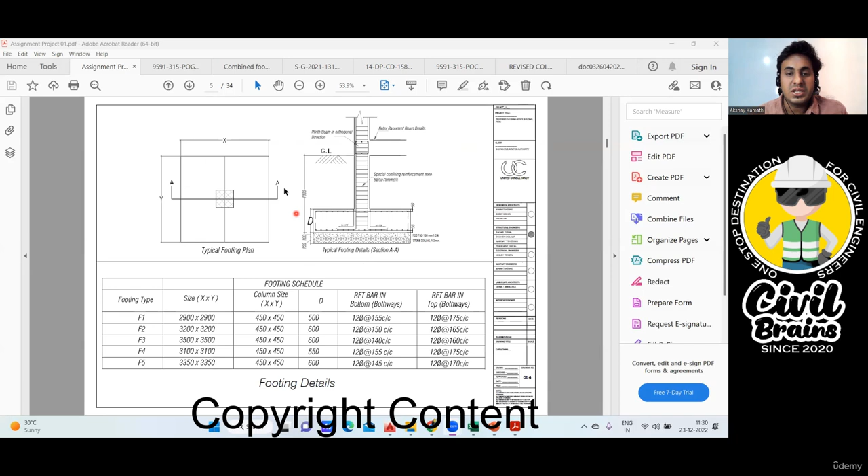All these drawings I've already given you, I hope you've downloaded them. If you remember, we had taken the quantity estimation for this footing as an assignment. Now for the same footing, this time the reinforcement is given.

What is written here? Reinforcement bar in bottom, 12 diameter at 155 center to center spacing, and bar in top, that is both ways.

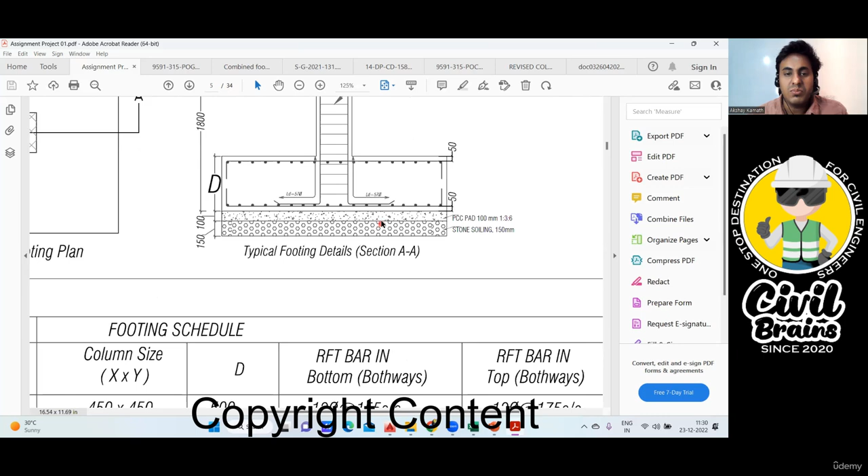Now here what has happened, see this is actually a kind of isolated footing. If you observe, it's isolated footing only, because there's one column and one footing. But like I told you, all isolated footings will not have only the bottom reinforcement. There's every chance it may have top reinforcement.

This situation usually comes when you have industrial structures, meaning you're putting an RCC substructure, and over that a steel structure comes, like your steel column, purlins, rafters and all. Due to wind load and all, there may be uplift, and sometimes because of that reason we give top reinforcement also.

And if you don't give the top reinforcement, that column may punch this footing and it may bulge in this portion. That is why, in order to take care of that, minimum reinforcement will be given in the top also.

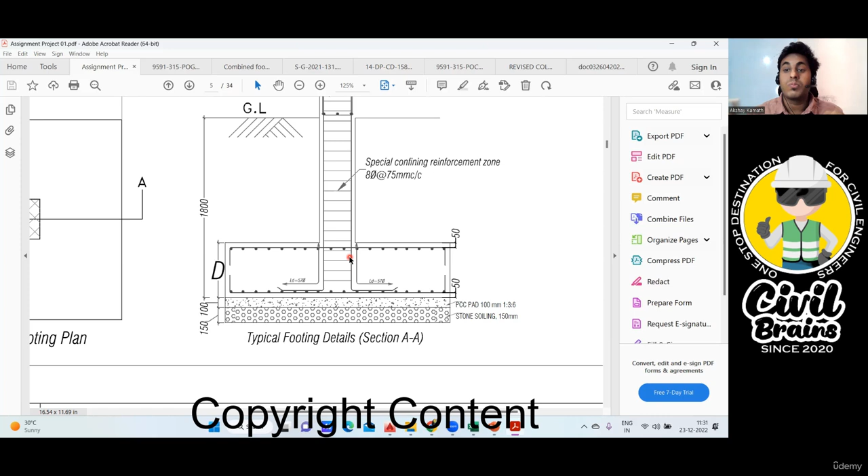So if you observe here clearly, the bottom reinforcement is given, which we usually give in isolated footing, and then the distribution bar. But similarly on the top also we have given. This is actually like a case of combined footing, but it is not a combined footing because you have one footing and one column. But I explained the reason behind that. So that is the reason you get reinforcement here.

It's written in the bottom and they write both ways. Now they don't give a column here. All the drawings won't be like you think. Usually what is mentioned here, both ways, means shorter span and longer span.

This is for the bottom. Similarly, this is for the top. Again, both ways means top shorter and top longer. Both ways means bottom shorter and bottom longer.

Few people, instead of writing it this way, would have made four columns: this for the bottom shorter, bottom longer, then again for the top shorter, top longer. This they would have done, but here this person has not given it that way.

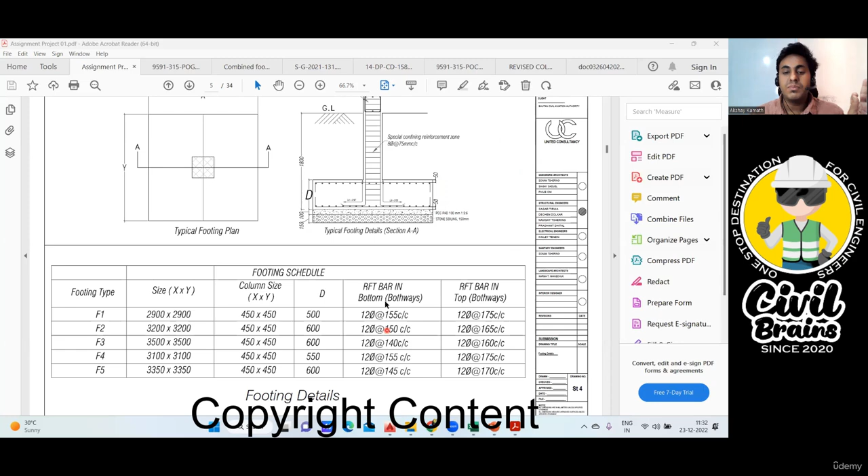Now you can do the BBS for this. Very simple. This BBS is similar to the Excel sheet I've taught you here, the combined footing I taught you, same thing. This is how your BBS should look.

Your bottom shorter will come, bottom longer will come, then again your top shorter will come and top longer will come. Nothing will change. If you want, we can do that also. I'll just input these values and you'll get the answer, so let me do that quickly.

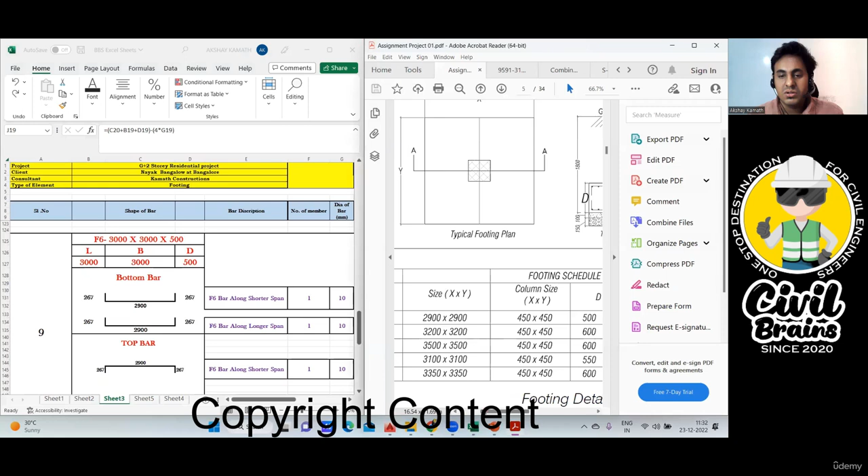First you have to mention the size of your footing, so it is 2900 by 2900. Just input here, 2900. This is also 2900. Then what is the depth of your footing? So the depth of the footing is 500.

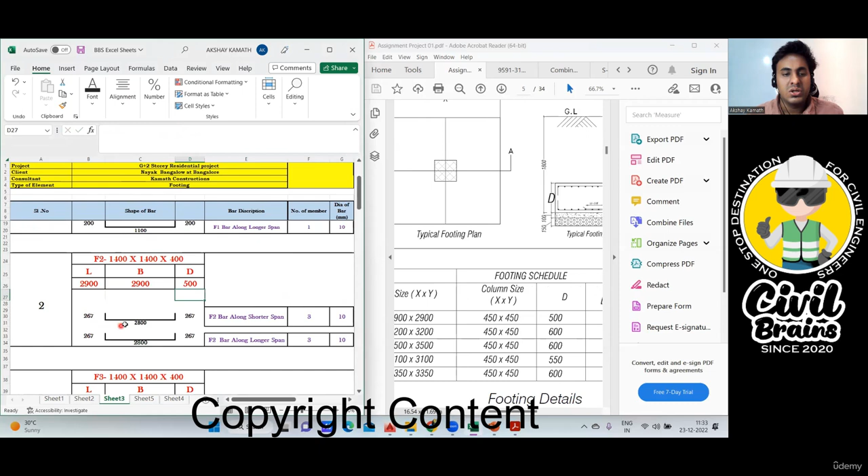So input here 500, done, finish. So accordingly you see you got this reinforcement. Okay, where did I put it? Wait, it has gone to the top.

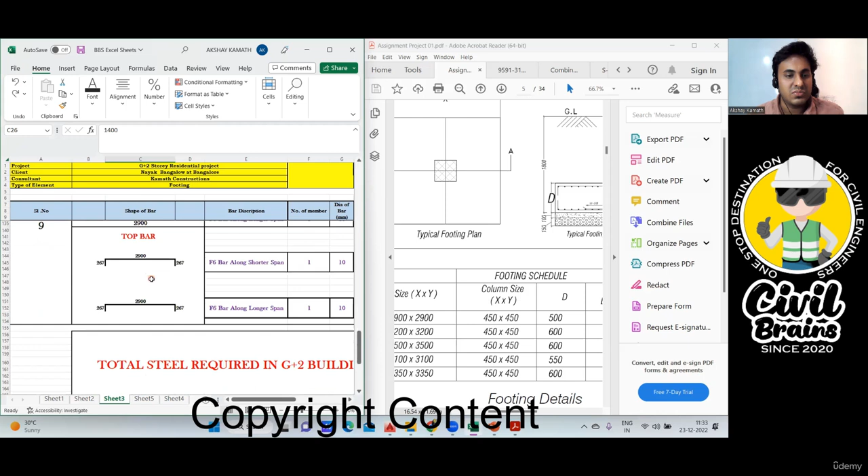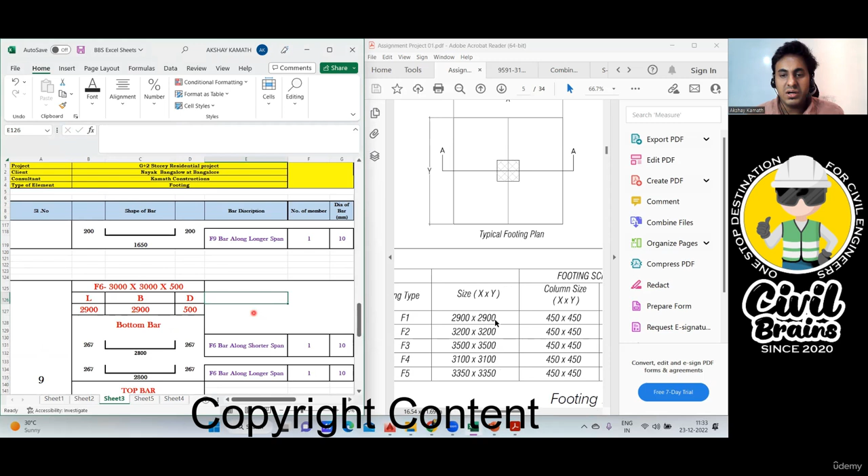No, it should come here, not there. Yeah, here it should come. This is that footing. How much is it? 2900 and 2900, and depth is 500. This is done. So you got the answer here.

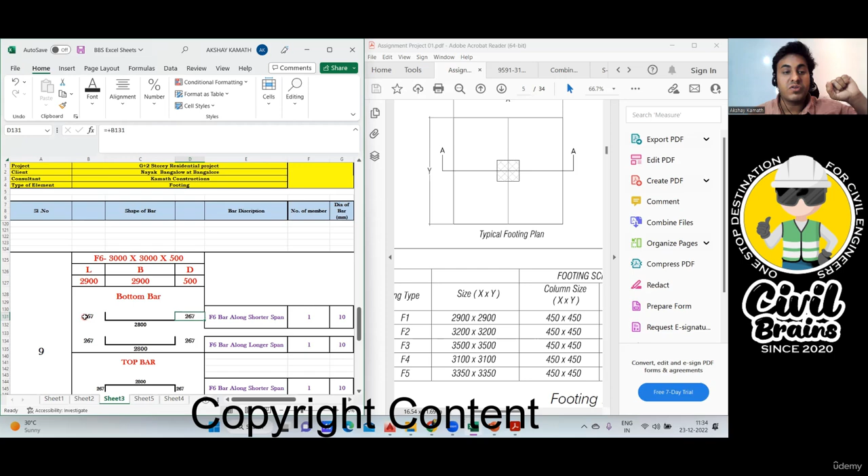Got it? Fine. Now come to the reinforcement part. So reinforcement has written, you're supposed to make use of 12 diameter bar. How many F1 footings are there? So the number is not mentioned. For our understanding, I'll take only one for the time being. Okay, and what is the reinforcement?

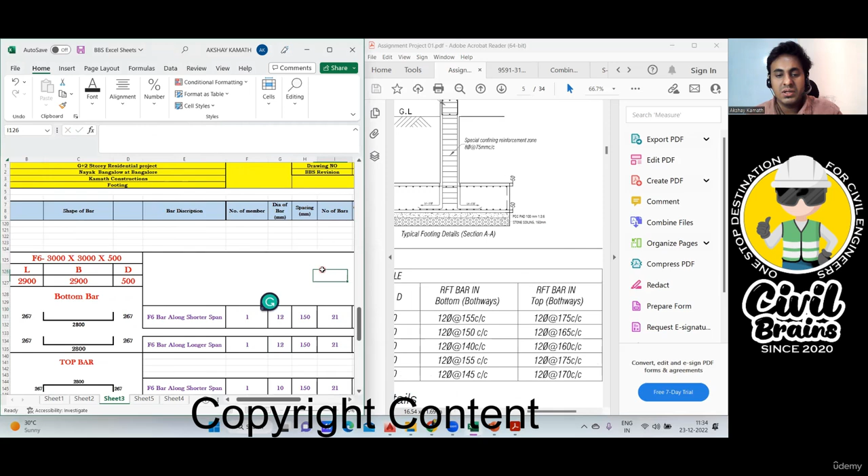12 diameter, so input 12 here, input 12 here. Okay fine, and it is 155, 155. Earlier I had put 150, you make it as 155, and here also you make it as 155.

Done. Where did I do? Along the bottom I did. I want top also, this is top reinforcement. Similarly come here, top also you change. Once you change here, automatically this part also will change. Only the thing is you have to change this part now.

Okay, this is 12 diameter, no? Make it 12, this is also 12. You know the reason, okay? 12, 12. And what is the spacing in the top reinforcement? See, it's written in both ways, shorter and longer, it is 175. So I'm making 175 here, 175 here, finish.

Done, okay, accordingly you don't have to do anything. You got the answer, total 20 bar is required. Here 20 is required, and in the top you require 18 and 18. Why does this become 17 then? This is 18, okay, round up.

I think a small mistake we have done, because this should have come plus 10, plus 10. Then why is it not coming? 175, 12, 12, 175. So round up, round up.

Okay wait. Okay, so this is one problem. See, if you interlink, if you write 3000 and all, it will create a problem. So always try to interlink it shorter, no? So I should take the longer one. Now it should come correct.

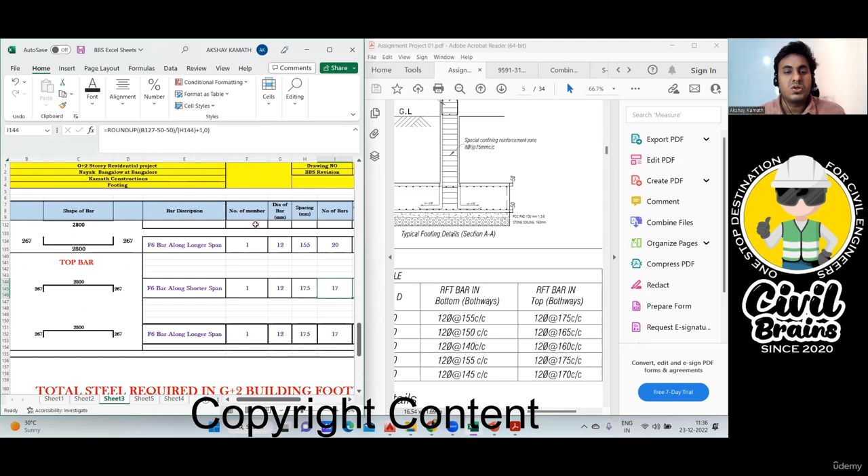Yeah, 17, okay. Because manually I'd input 3000, no? So obviously the Excel sheet will not work out. So always try to interlink that, this has to be interlinked. Okay great, now it is 17, 17.

And I think, yeah, here also there is a mistake. See, here also 3000 I had written manually. You should not write that, you're finding along the shorter, no? So you have to take the longer span. Spacing you're finding, no? Yeah.

And here also it should not be 3000. Okay, you're finding the shorter, longer, no? You have to take shorter, that is B. Now it is correct. Here also you have to take, fine, now here it is correct.

Okay, anyhow let me make it clear. I have taken shorter span, if I'm taking shorter I have to take the longer one. Okay, longer I have taken, correct. And if I'm taking the longer, I have to take the shorter.

So shorter will be, yeah, shorter will be C. Yeah, so correct. B, and this is C. So okay, fine, good, done.

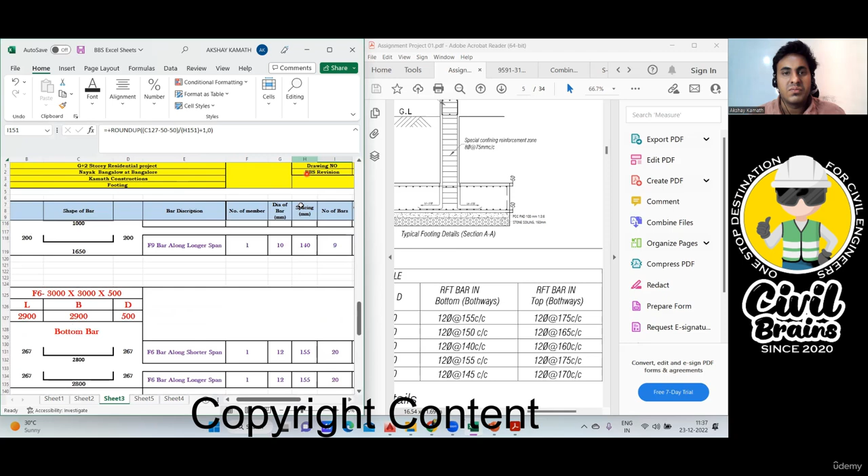Finish, your answer is ready. Only thing is, what change are you supposed to do, no? This answer will come in 10 diameter, which is actually wrong because we're making use of 12 diameter, no? So in that case what you do is you strike out the answer, you delete this, you delete this, you delete this. Why? Because it is 12 diameter, so your answer should come in 12 diameter.

So what you do is you come here, say plus this total cutting length, you multiply this total cutting length with weight of 12 diameter, which is 0.888, and hit the enter button. Finish, so 58.35 kg of steel is required.

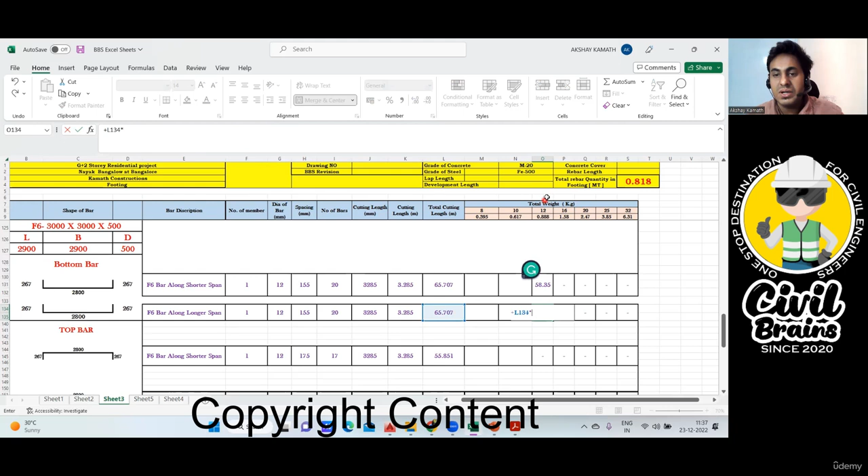Similarly here also you are supposed to do the same thing: 65, multiply this by 0.888. Okay fine, similarly here also, click on this and multiply by, again it's a 12 diameter so 0.888, enter. Similarly here also this one multiply by this one, enter. Got it? So this is the right answer what you have got.

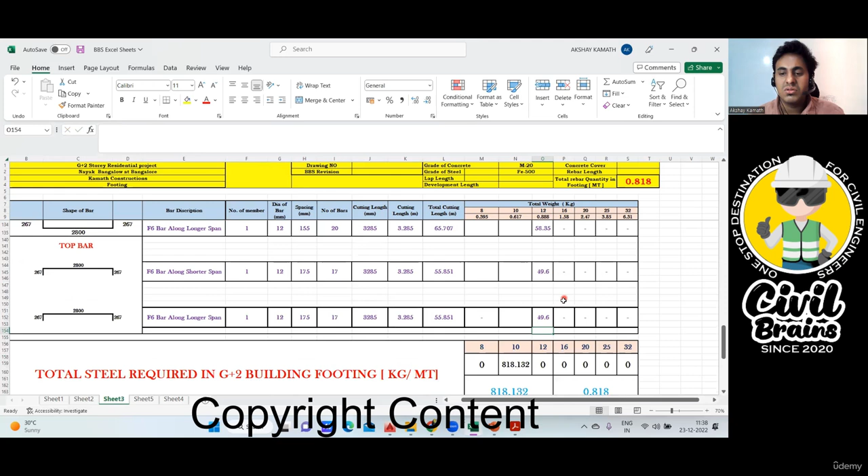Got it? So if you want, you do it manually and check the answer what you have got, you'll get the same answer. So that is the easiness of doing an Excel sheet. If you prepare the Excel sheet in this way, you can take out all the quantities.

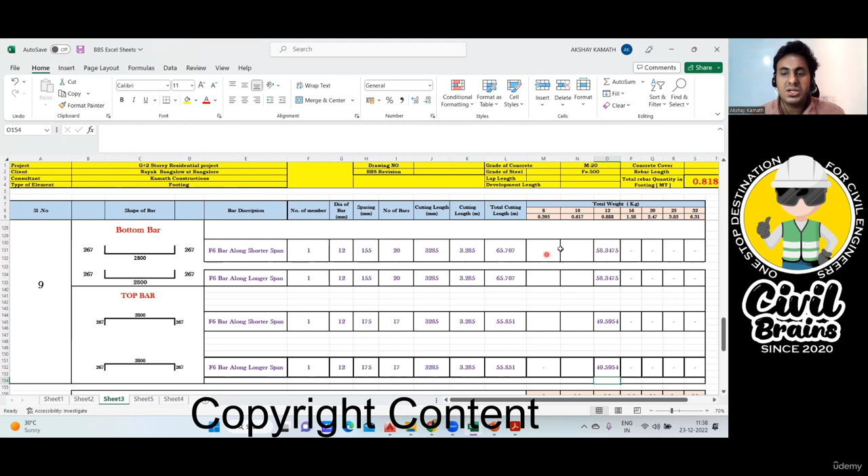So one I've explained, similarly rest you try to do on your own because now you are in such a position where you can do all these things. Okay, similarly try to do it. I always tell, if you're working for the first time, do it manually, then do it on the Excel sheet and try to verify the answers. Only then you'll have confidence in that.

Okay, now try to do for the other thing also, all these things you try to do on your own. Okay, one assignment is done. I'll go to one more assignment now. So one more assignment is this one.

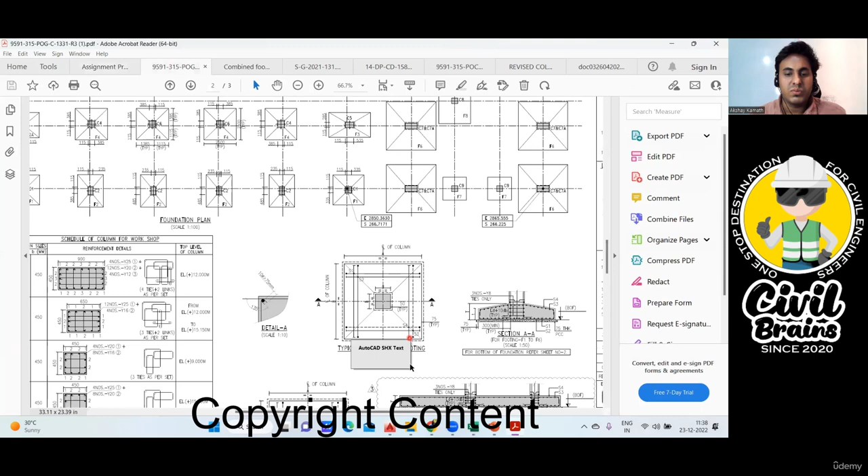Okay, I won't be sharing this drawing since these drawings are not to be shared, okay, they're confidential drawings, only whichever is shareable I'm going to share. Okay, don't ask for all this drawing. Only thing is what you do, you just take a screenshot of this, if you are interested, take a screenshot.

Now here, all the footings are given. Here you just concentrate on the reinforcement details. Again same thing, here S1 and S2 is mentioned, S3 and S4 is mentioned. What do you mean by this?

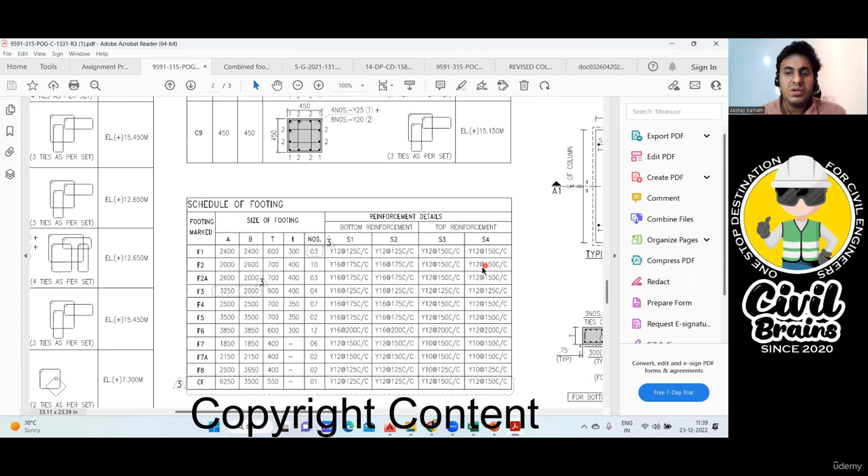The meaning is very simple. This you consider as a shorter span, this you consider as a longer span along the bottom. Again top reinforcement, again this you consider along the shorter span, and this you consider along the longer span. Okay, if not in that way, usually what you can do is you can check the cross section of the footing.

See, this is a cross section what is given. Now if you observe here, see where it is mentioned. So your S1 is S1, and this is S2 they have written, and this is S3 and this is S4 they have written.

Okay, so how do you understand this? It's a cross section what they have given. So you can consider your S1 to be your distribution bar and S2 be your main bar. Similarly, on the top, this S4 is your distribution bar and S3 is your main bar.

Wait, sorry. S4 is your main bar because bottom shorter span, bottom longer will come. Again in top, shorter span, and inside that will be your distribution bar. The main reinforcement will be at the top, whereas in the bottom, the main reinforcement will be in the bottom. In the top, your main reinforcement will be the top. After the top, the bottom is next to the top. This is top main bar.

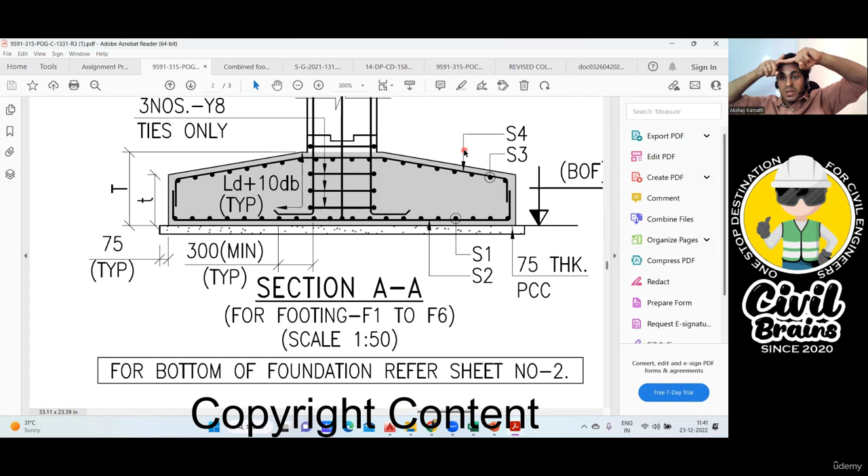This will be below that. But in bottom, this will be main. Over that, the distribution will come. And in the top, this will be main. Below that, the distribution will come. So in the top, this will be my main reinforcement, and this will be my distribution. In bottom, this will be my main reinforcement. The dotted is a distribution.

Okay, fine. And for that, they have given it here. If you don't understand from there, they have given it here also. So how they have given, you can go through this drawing. So this is typical. They have written like this is S1. Where is S1? This is S1. Okay, this is S2.

And this is why it is dotted. The dotted indicates it's a top reinforcement. And S4 is top, S1 is bottom. Are you getting my point? Usually if you don't understand, whenever a drawing mentions dotted, it means it is in the top reinforcement. They mark it as a dotted line. That is a typical way of doing structural detailing.

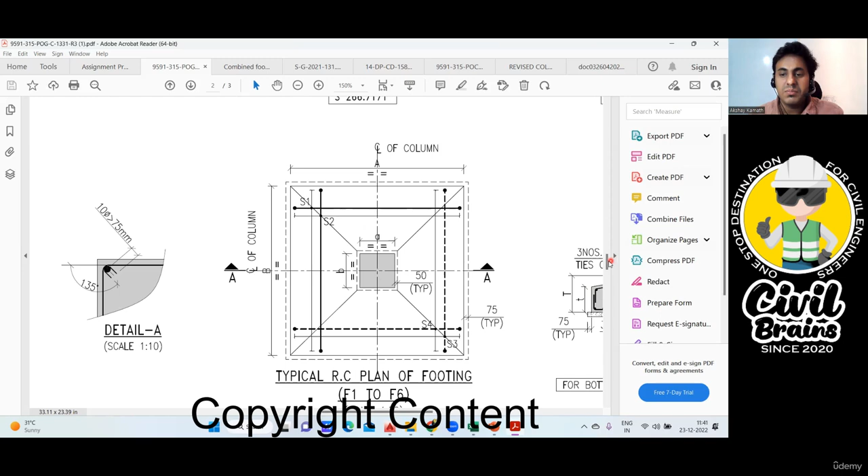So this is S1 and S2. And then based on that, you can check this thing. Come to the footing reinforcement. Anyhow, it doesn't matter to you. You just take out the quantities if you are interested to take.

So you take this as shorter span, you take this as longer span. And on top, you take this as shorter, you take this as longer. Okay, very simple. And anyhow, it's very simple also.

See, this is 125, 125. It is 150, 150. Again it is 175, 175. This is 150, 150. 175, 175, 150, 150. 125, 125, 125, 125.

Got it? Just in case, take a screenshot of this and try to do the BBS for this. If you have any doubt, get back to me, I'll solve your doubt.

Again, even though this is an isolated footing, this CF means combined footing. Even though it's an isolated footing, again you get a bottom reinforcement and top reinforcement because it's an industrial structure. In industrial structures, you get such kind of reinforcement.

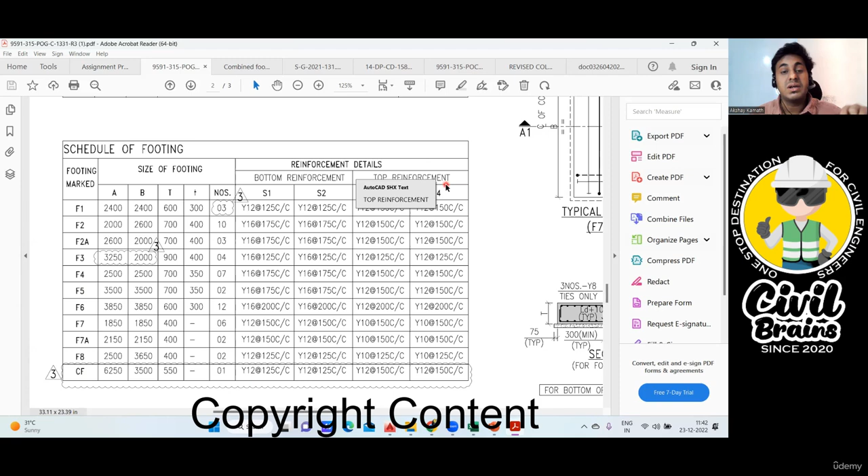Okay, two assignments are done. Next, we'll go to the third assignment. It's totally up to you whether you want to do it or not. If you are okay with the concepts, you don't have to do that.

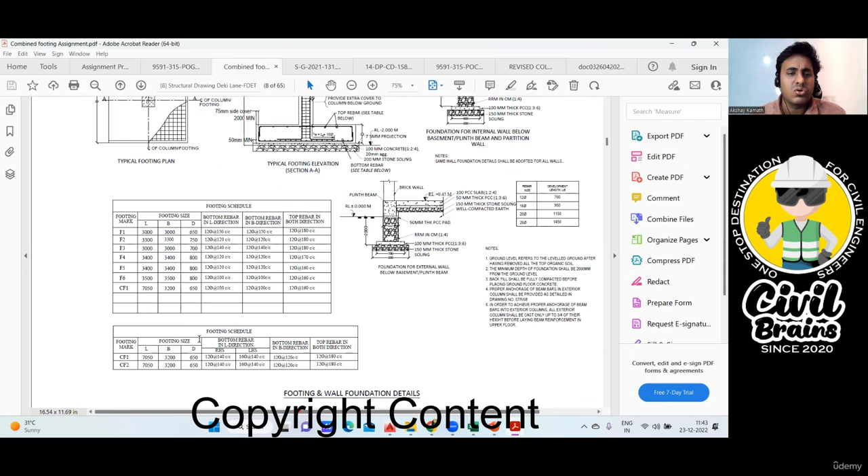That's it, simple. Again, here also same thing. Footing schedule is given. Bottom rebar in L direction, that means along the length direction, and bottom rebar in B direction, along the breadth direction. That means this is your shorter span, this is your longer span. That is why we have prepared the Excel sheet in that way.

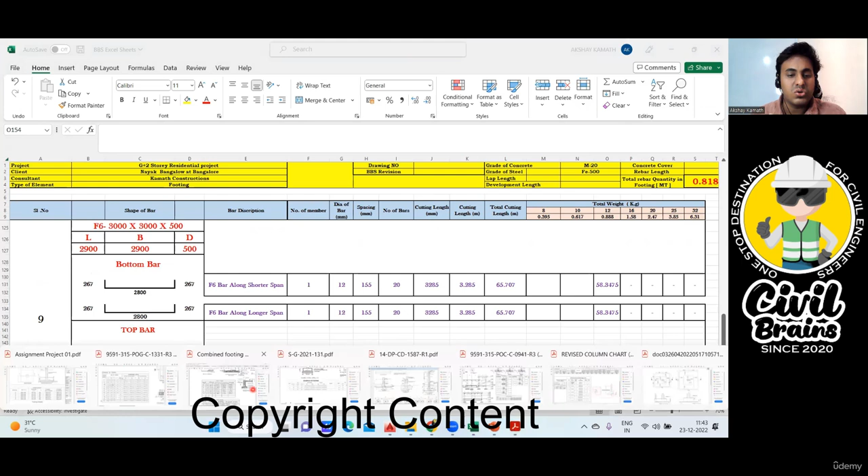Bottom and top, along shorter span, along longer span. Got it? Then the drawing is given to you. Based on that, you can take out the quantities. So this is a drawing given. Can you take out the quantities here?

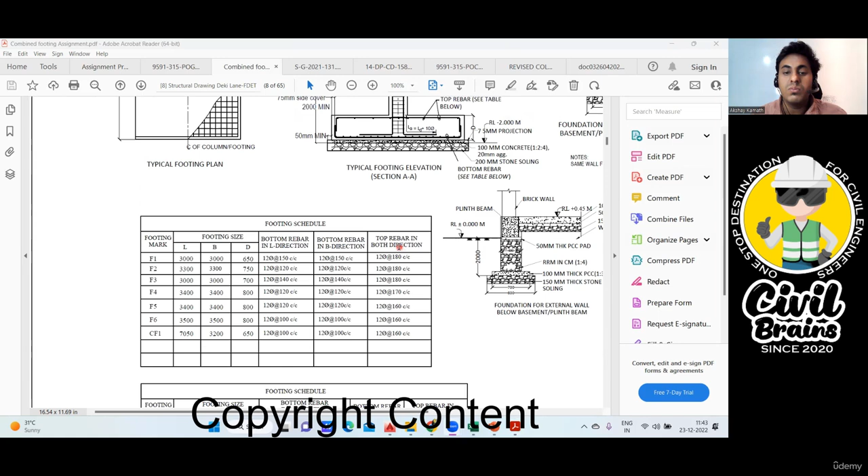Again here you see same thing. Bottom shorter, longer, and top also shorter, longer, but it is given in both directions. It's understood that longer and shorter both are 12 diameter at 180, 180 spacing. So you can do the quantity estimate, I mean BBS, for this particular footing also. Try to do one or two footings so that you get an idea.

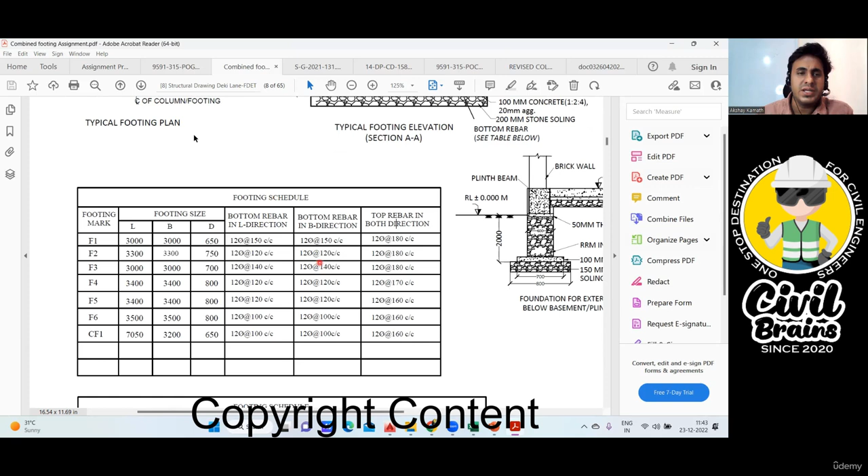Fine. Next, in the same way, I'm taking a lot of drawings. You take a screenshot of this because these drawings are already shared with you.

This drawing is shared with you, and this one too. But this drawing I cannot share - you can take a screenshot of it instead. Don't ask me for these drawings because those I cannot share, but you can take a screenshot of this one. You note it down and do the calculation yourself. Then if you want me to verify it, send me the Excel sheet and I'll verify it.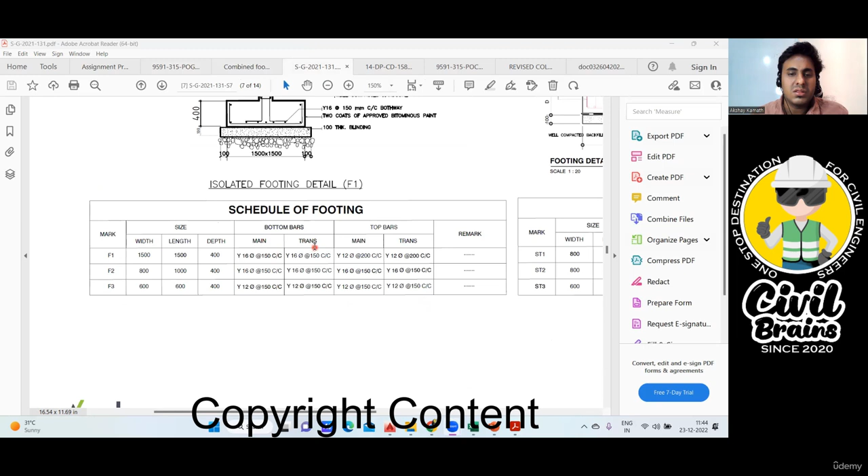Okay, bottom bar, top bar - again same thing. So bottom main, this is TRANS. What is TRANS? I don't know what you mean by TRANS exactly, but actually it's distribution steel - main bar and distribution. Okay, understood.

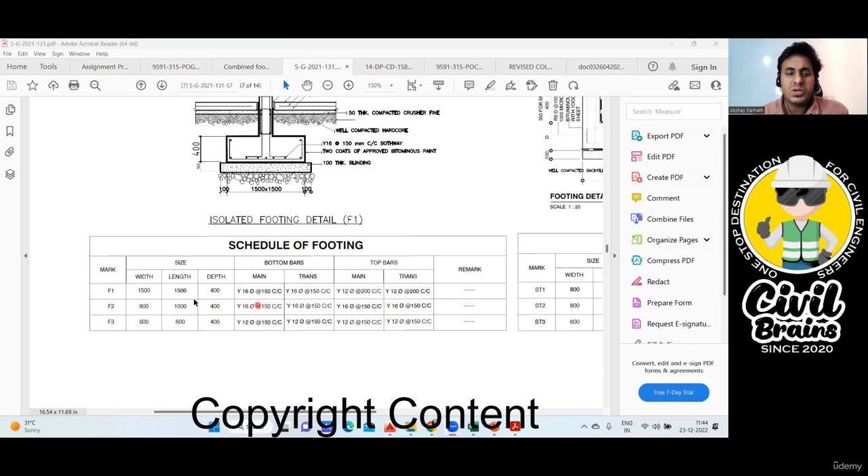You can do for this also. Then, I had taken one drawing earlier where I explained this - the slope footing. For the slope footing, it's the same thing. BBS won't change, only the estimation will change, whereas BBS remains the same for the slope footing also. So for the slope footing, they have mentioned it here.

You can do this too. See, footing F1 and F2 is given. Forget about all these things - this is not required. When you come to the BBS, this part is not required. We are only concerned with the steel, so it's written here.

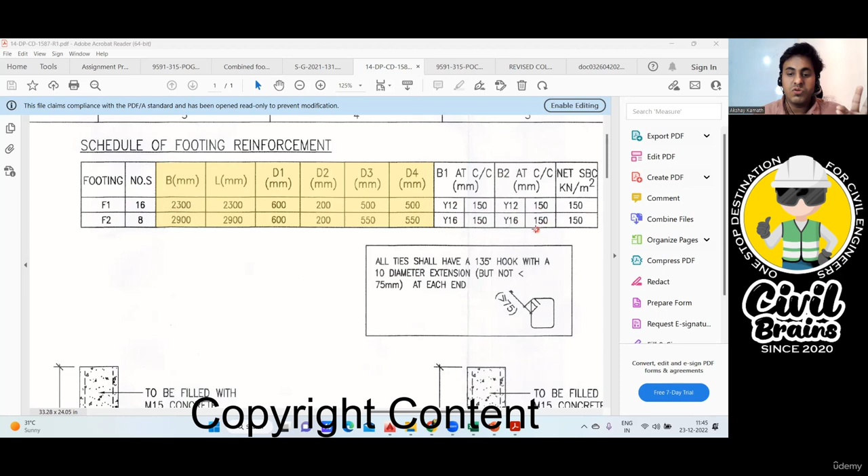I'll go to the Excel sheet and take one footing - this particular footing. I'll go here and do it here. Quickly tell me what is given there. So I can do it in this way.

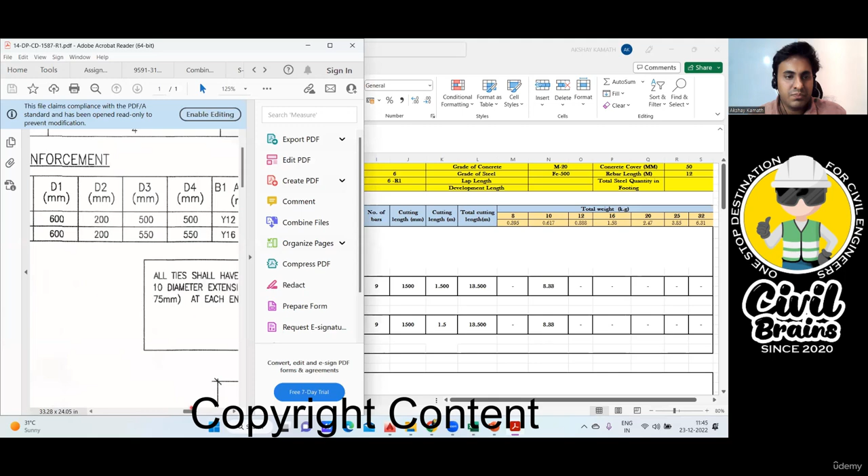I want the size of the footing, which is 2300 by 2300. Let me input that - 2300, and this is also 2300. Done. Next, I want this thing.

So what is the depth of the footing? In the depth, what you're supposed to do is take the overall depth. Oh yeah, overall depth - no wait, not the overall depth, you're supposed to take this depth in case of this footing. Yeah, this you may have a doubt about.

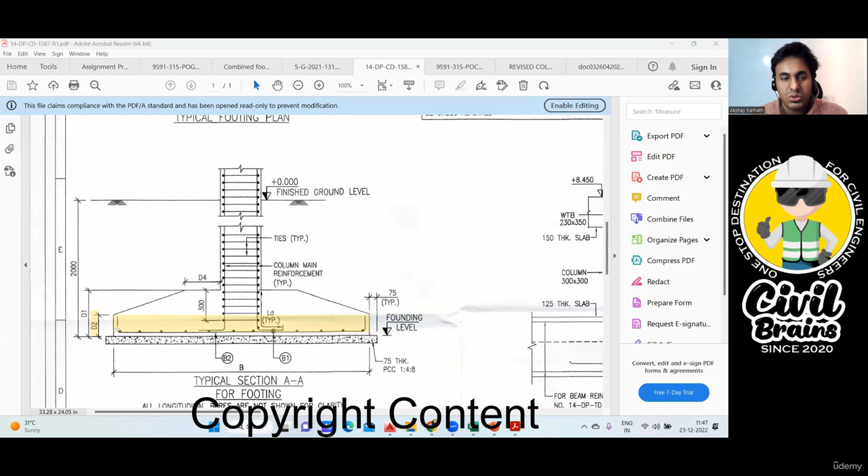See, when you're doing this slope footing BBS, your D will be only up to this depth, because your L will go only up to here. So you have to consider D2, not D1. D1 is the overall depth, that is not required. Your L shape will be bent only up to here, so take the D2 dimension. For the D2 dimension, we'll go back to that again.

So we'll find D2 from here. We have to take D2, which is 200 in both cases. So again it is 200 for us - I'll take 200, so depth will be 200. I'll change according to that, and we can round this up.

So you round it up since it is coming to this point - round up, comma 0, close the bracket. Okay, the error is because of the bracket, so give one open bracket. Now it will be okay. Fine, 67, 67 - got it?

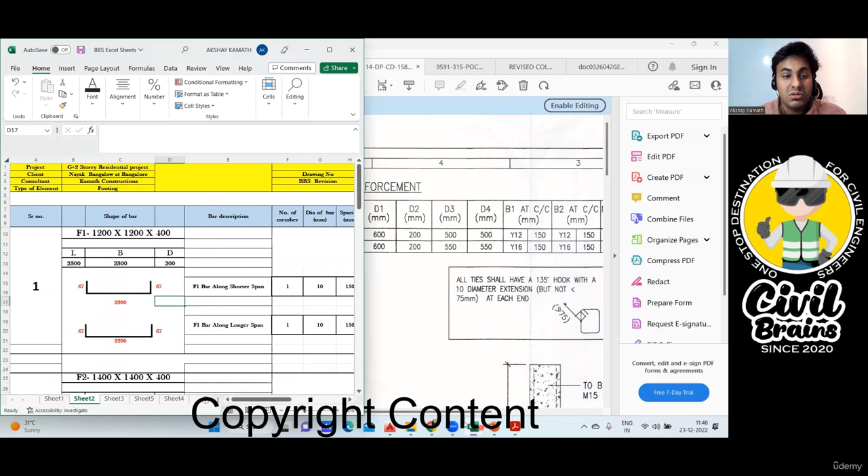No, when it comes in decimal, try to change it. Finish, now come to number of bar. How many F1 footings are there? There are 16 F1 footings. So come here, make 16 here and make 16 here.

Finish. Again, then diameter - you're supposed to make use of 12 diameter at 150. This is along the shorter span I'm doing - first this one, 12, and spacing is 150. This is the shorter span, so shorter I've done 12 at 150. Next I'm doing for the longer span - the longer I haven't changed, it is mentioned again 12 at 150, so here you change it to 12.

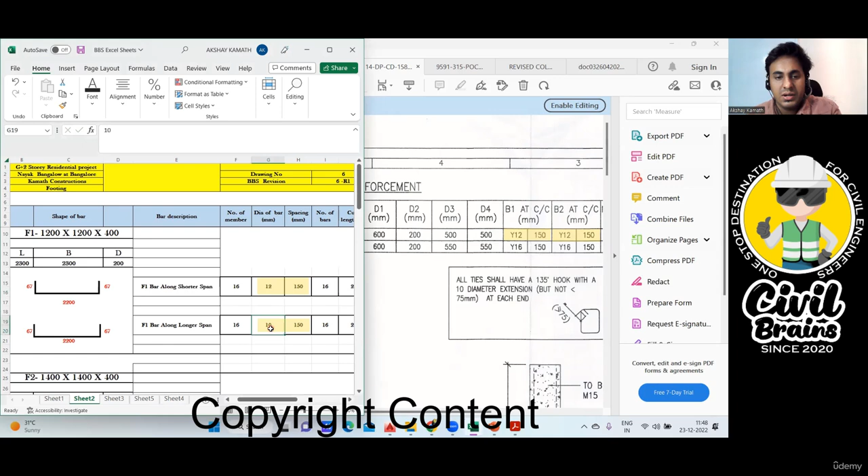You make it 12 and this is 150. Got it? Done, finish. Once you do all this update, finish. Your answer is ready. What is the answer? Simple. Your total cutting length will be 2200 plus 67 plus 67.

Okay, I haven't done the bend deduction. If you want, you know the concept now. Bend deduction, if you want, you apply it. Let me apply minus 4 into, which is that? This one, 12 I'm supposed to take. Done. Here also, if you want to apply bend deduction, minus 4 into 12. Done. Okay fine, and total cutting length will be how much?

How much cutting length? 2.286 is the cutting length of one bar. Multiply by number of bars. Number of bars I'm getting 16 into 16, I have to do because there's 16 F1 footing. Okay got it? So totally it will be how much?

Now one change should happen. Always remember, because I'm finding the weight of a 12 diameter bar, but my weight is coming in 10 diameter column, so this I should delete. So when you do this, this is one problem, you come in the 12 section, right? Plus this multiply by 12 value. Enter, finish, your answer is ready. Plus this one multiply by 12 value. Done, finish. So this is the total steel that is required.

If you're putting an F1 footing of 1200 by 1200 by 400, having 16 numbers according to this particular drawing, then your BBS will be this much. When you give it to the bar bender, you have to tell cut this 2200, cut this 67, make this 67, 67, 67, 2200, and accordingly you try to do. And if you ask what should be

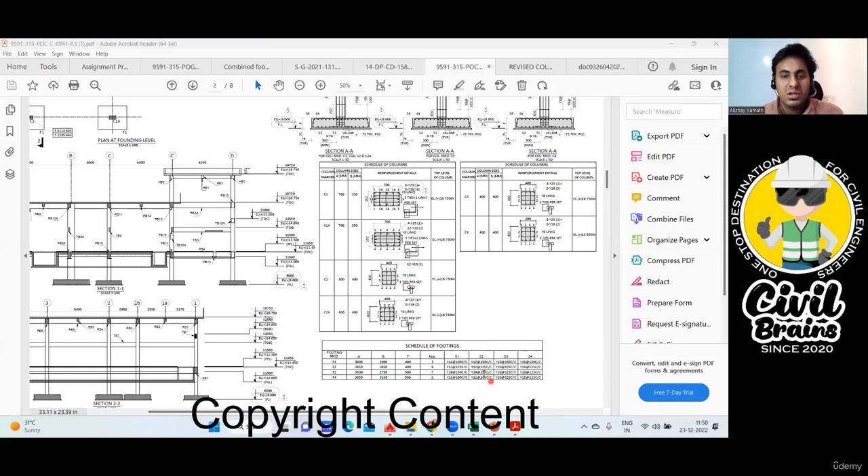Okay great, I think most of the things I've taken care of. Okay, and then again, I think it's enough. Most of the things I've explained you. Again it's the same thing. If you want, again, not required.

This is another, again I won't share this drawing. This is another industrial building, because whenever you find, no, this is actually isolated footing, F1, F2, F3, F4. If it is combined, it will be CF1, CF2. It's isolated, but you're getting a bottom reinforcement shorter span, longer, top reinforcement shorter, top reinforcement longer. Done. If you want, you can do BBS for this also, so that you don't have any doubt.

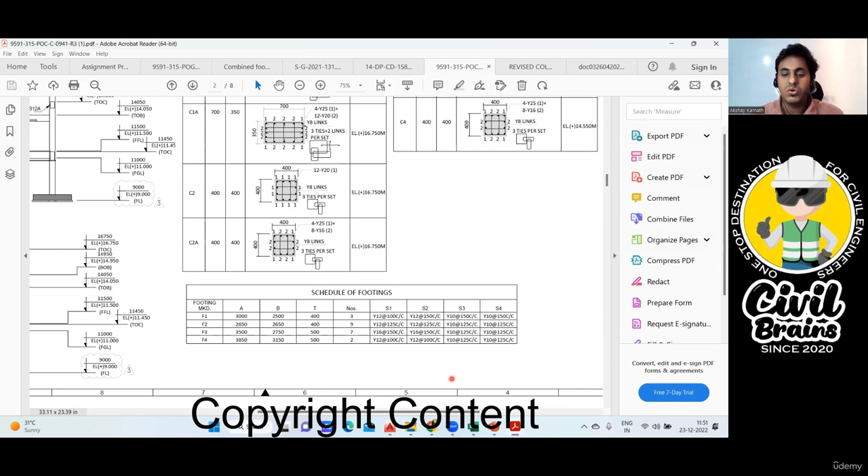Now let me go to a few of the industrial projects. Again, same thing. This was one of the projects which I had explained you in the quantity estimation time. Right now, see, this is BBS. If you can do, very simple, we can do the BBS. Same thing, just I'm showing you just for your understanding. Okay, yeah, again,

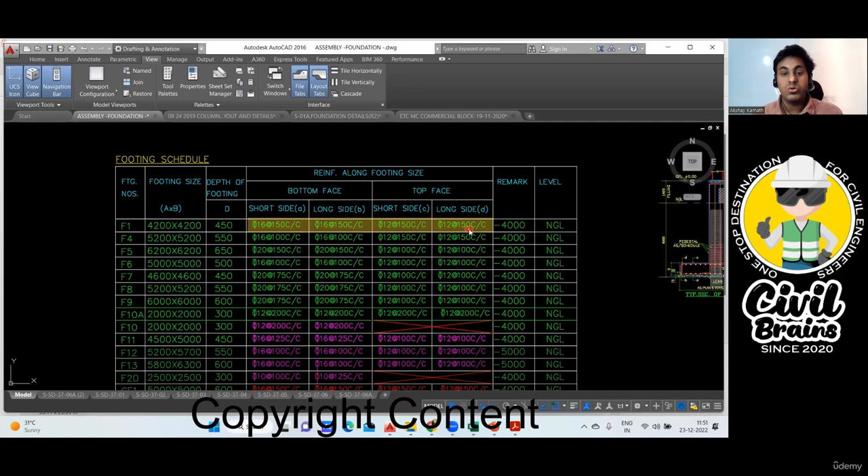same, bottom face, shorter side, longer side, 16 at 150, 16 at 150. Again top face, shorter side and longer side. You can do the BBS, very simple. What you're supposed to do, just take that value and you have to input that in this particular area, this particular thing, okay, because you have a bottom, you have a top reinforcement.

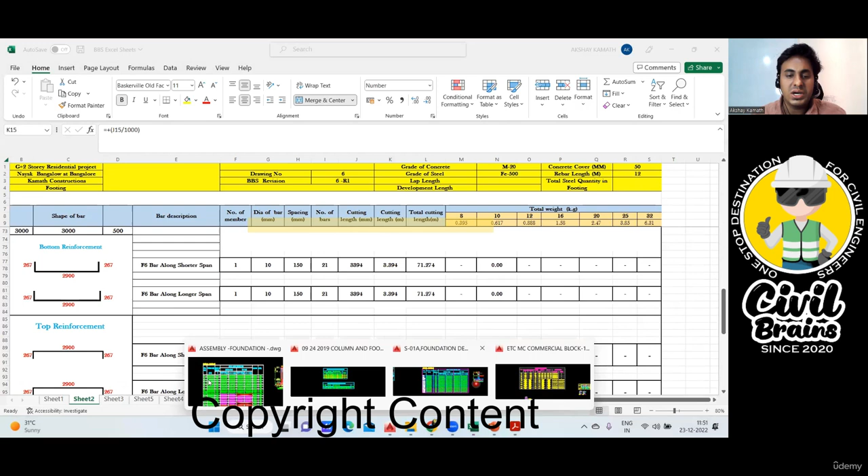So this you can do, no? You can take a screenshot of this, and if you want, you can solve one or two problems, so that I'm trying to touch all the drawings. This is another industrial project. Okay, because industrial projects are a little bit complicated. That's it, this is one more.

I think, yeah, this is another commercial building, a very big commercial building. I won't share this drawing, okay, because few things I have shared, I already told you. And then don't message me for the drawing. Those drawings which are shareable, I'm going to do, because all these things is not required for you. Whatever is required, I'm showing it here. Okay, you can take a screenshot of this.

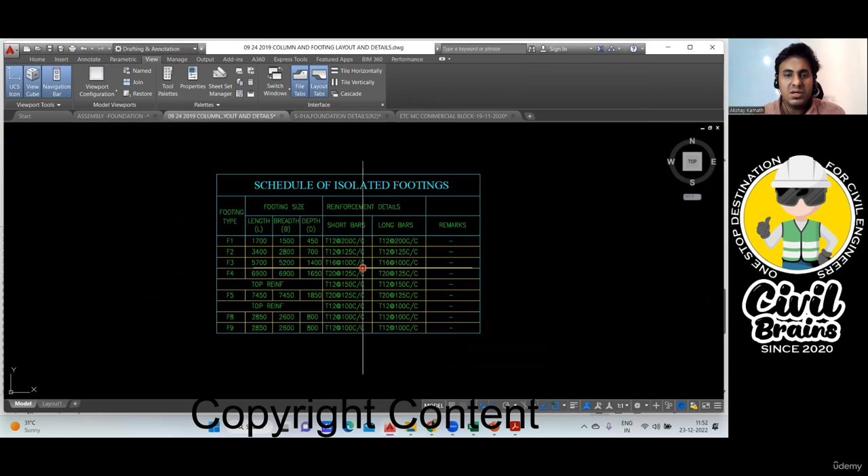Yeah, you can take a screenshot of this and you can take out the quantity. Okay, again see here. Yeah, see here, F1, F2, F3, F4, this is your isolated footing. F5 is also your isolated footing. F8, F9 is also isolated footing. Okay, and here what has happened, I'll tell you.

See, this much footing, F1 up to F3 footing, this is your isolated footing, where you have reinforcement in the shorter span, that is bottom reinforcement, and longer reinforcement you can do. There is no top reinforcement here. F1, F2, F3 same. Similarly your F8 and F9. F8 and F9, this is also isolated footing, where you have a shorter reinforcement in the bottom, 12 at 100, and 12 at 100 in the longer span. These things you can do.

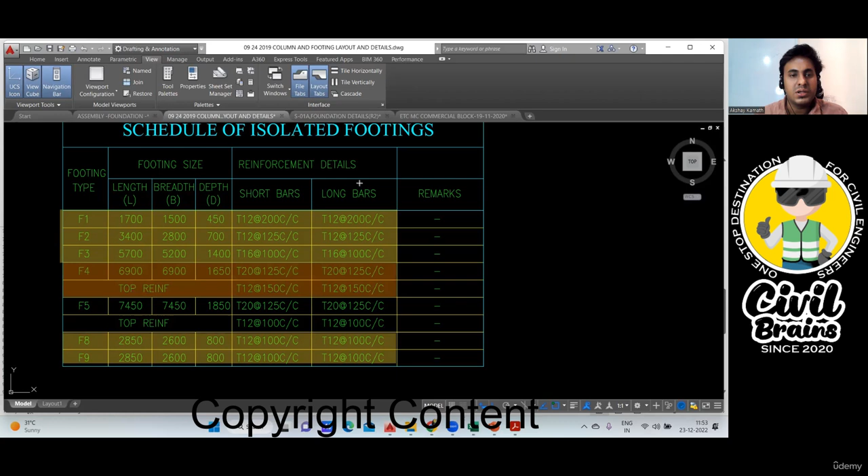Whereas this F4 footing you see, and your F5 footing, this is also isolated footing, but these people have bottom and top reinforcement.

Now you see how these people have mentioned it here. F4, they have given reinforcement 20 dia at 125 center to center spacing, bottom in the shorter span, 20 at 125 center to center bottom in the longer span. Now he has mentioned top reinforcement: 12 dia at 150 in the top along the shorter span, and 12 at 150 in the longer span. Very simple, you have an Excel sheet ready, or you do it manually, you get the answer.

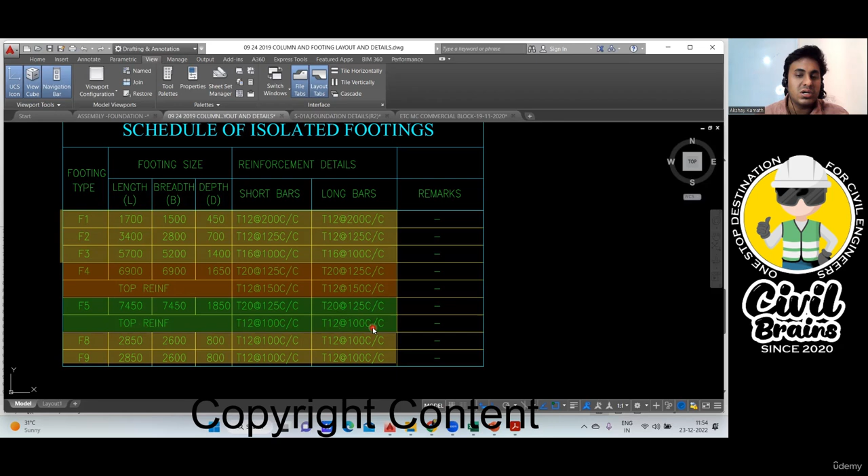Similarly, F5 also same thing: 20 at 125 along the shorter in the bottom, 20 at 125 along the longer in the bottom. Now for the top, they have mentioned 12 at 100 center to center spacing in the shorter span, and 12 at 100 center to center in the top. Pretty simple, done. These things also you can do.

Yeah, this is another commercial building. So I've taken care of all the buildings, commercial, industrial, house building, everything I've explained you. So this is commercial building. Here what has happened? This F1 footing,

F2, F3, F4, all these are your isolated footing. How did I say that this is isolated footing? Very simple, forget about everything, come to the reinforcement part. We should always concentrate on the reinforcement part. So this is your reinforcement part. Concentrate here, enough. So what is written? Bottom and top is written.

So only the bottom is showing, that is 12 diameter at 150 center to center spacing. This is also 12 at 125 center to center spacing, 12 at 100 center to center spacing, 12 at 100 center to center spacing. He has written only bottom, but he has not mentioned whether it is shorter or longer. If they are not mentioned whether shorter or longer, it means both ways, shorter and longer, you have to provide 150, 12 at 150, along the shorter, along the longer, in case of F1, F2, F3, and F4. Got it? Because there is nothing mentioned in the top.

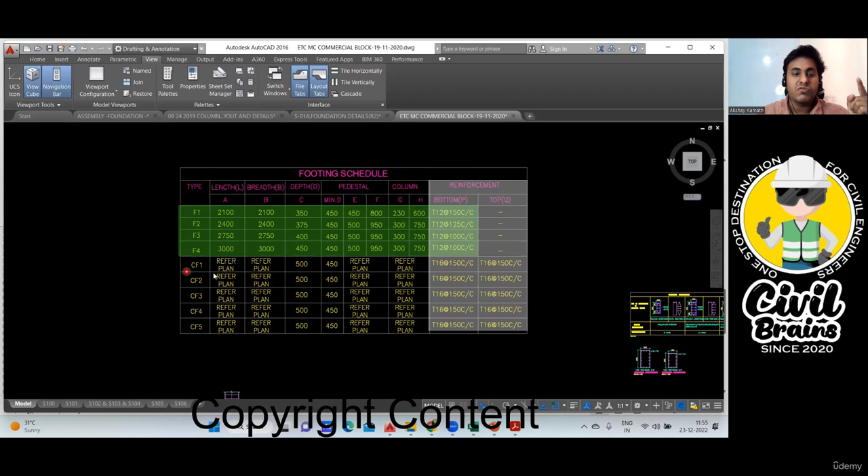Now, when you come to the combined footing, CF1, CF2, CF3, 4, 5 means it's a combined footing. C for combined, F for footing. So here you will get bottom reinforcement and top reinforcement. In the bottom, you're supposed to provide 16 dia at 150 center to center, along the shorter, along the longer. And in the top is mentioned 16 dia at 150 center to center, along the shorter and along the longer. Got it? In this way, CF1, CF2, CF3, CF4, and CF5 you're supposed to do.

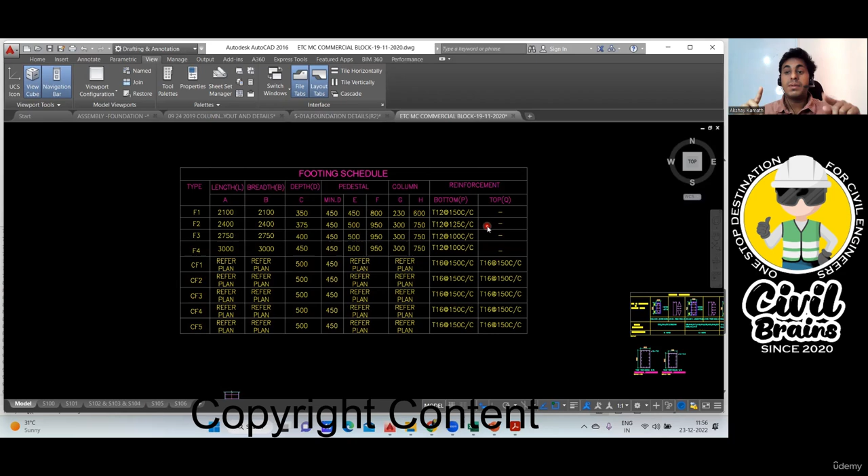So in this way, you can take a screenshot of this. If you're interested, take out the quantities of this. Very simple, if there is bottom and top mesh, use this Excel sheet, the last one, this one. This will solve your answer. If there is only bottom reinforcement, then use any one of the Excel from here. Your answer will be ready.

And make sure, because here whenever you get the steel answer, make sure to change it. Suppose if it is 12 diameter, it should come in the 12 column. Later I'll explain you one more way, not now, maybe once I finish all the lectures, I'll take you to a few of the advanced topics of the Excel where you don't have to change this. Right now you change it, but later I'll tell you one method where you need to apply coding, if formula, while and all. There you don't have to change. The moment you insert 16, automatically your answer will come in 16. The moment you enter 20, automatically your answer will come in the 20 dia column.

20, 20 column, I mean this particular row. Right now, you will not do that, you practice this method. Later, once I finish all the BBS part, when I go with the Excel calculations, I'll add one lecture where you can make use of that formula, because you need to write if and all there. We'll do that later so that you don't have to change it. So that comes under the advanced part. Right now, you finish these things.

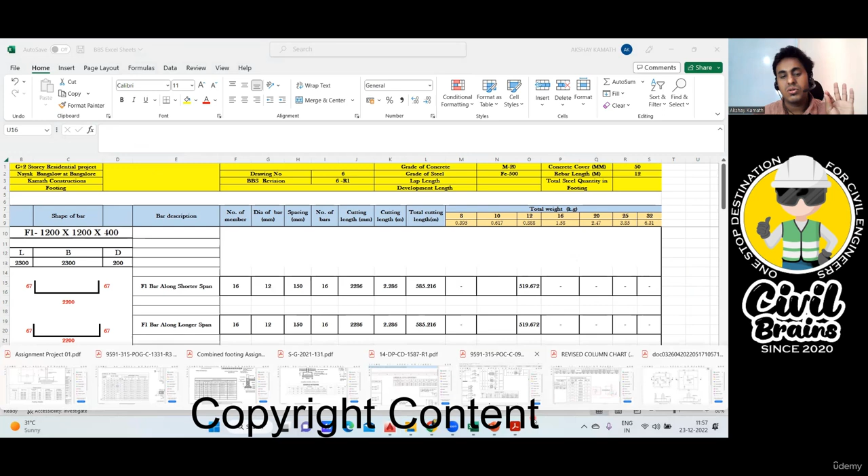So I hope I was able to explain most of the things, and I've covered almost all the drawings here, industrial, residential, commercial, and all. So everywhere I taught you how it has to be done. The concept remains the same, only the size of the footing will change, and only the diameter and the spacing is going to change. Rest the method remains the same. So we'll see you back in the next lecture. Thank you.